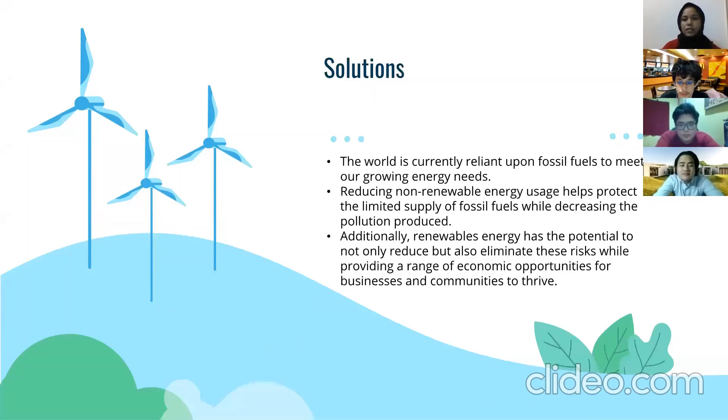The world is currently reliant upon fossil fuels to meet our growing energy needs. Reducing non-renewable energy usage helps protect the limited supply of fossil fuels while decreasing the pollution produced. Additionally, renewable energy has the potential to not only reduce but also eliminate this risk, while providing a range of economic opportunities for businesses and communities to thrive.

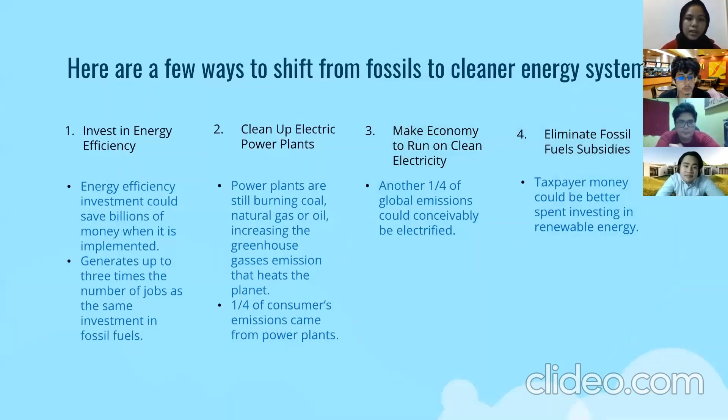Here are a few ways to shift from fossil to cleaner energy systems. Firstly, invest in energy efficiency. Energy efficiency investment could save billions of money when it is implemented. It will also generate up to 3 times the number of jobs as the same investment in fossil fuels.

Next, clean up electric power plants. Power plants are still burning coal, natural gas, or oil, increasing the greenhouse gas emissions that heats the planet. A quarter of consumer emissions came from power plants.

Next, make the economy run on clean electricity. Lastly is eliminate fossil fuel subsidies.

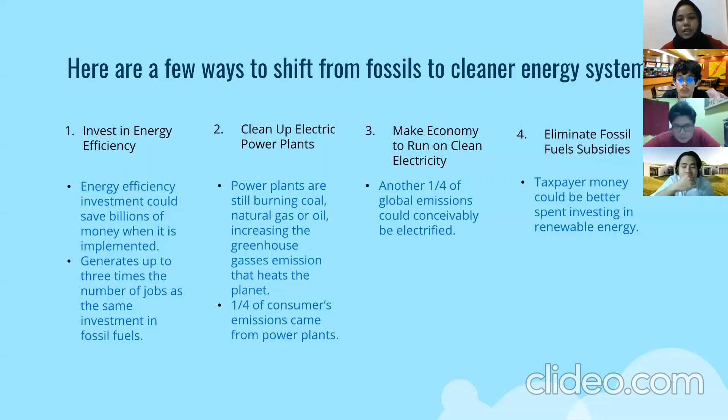Okay, for the factors, non-renewable energy will potentially undergo an age of extinction within the next hundred years or so in the future. So humans need an alternative energy to ensure the sustainability of human beings for survival.

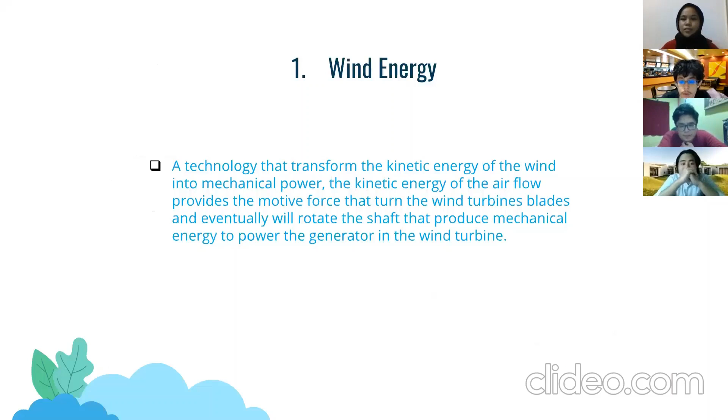Okay, the first energy that we're gonna talk about is wind energy, an energy that transforms the kinetic energy of the wind into mechanical power. The kinetic energy of the air flows provides the motive force that turns the wind turbine blades and then eventually will rotate the shaft that produces mechanical energy to power the generator in the wind turbine.

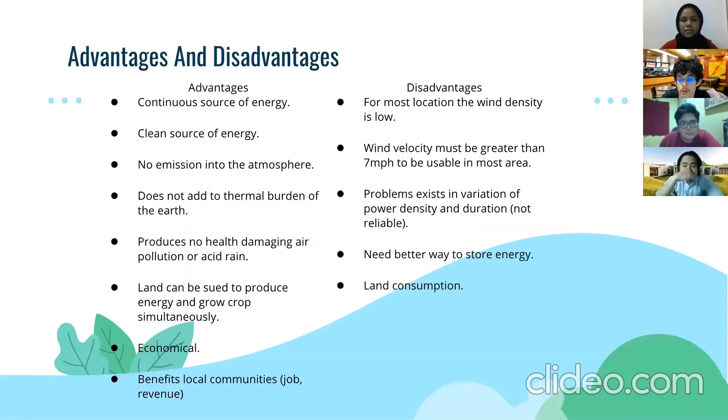Advantages and disadvantages. Advantages: continuous source of energy, clean source of energy, no emission into the atmosphere, does not add to the thermal burden of the earth. Disadvantages: for most locations, the wind density is low, wind velocity must be greater than 7 miles per hour to be usable in most areas.

Second energy that we've chosen is solar energy, an energy that derives from the sun. This energy can be used to generate electricity and heat.

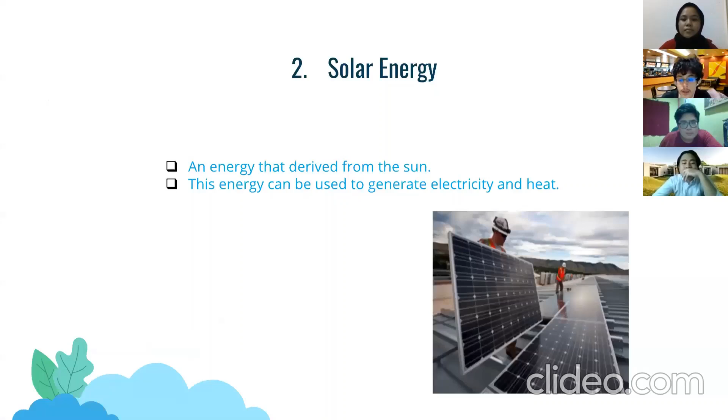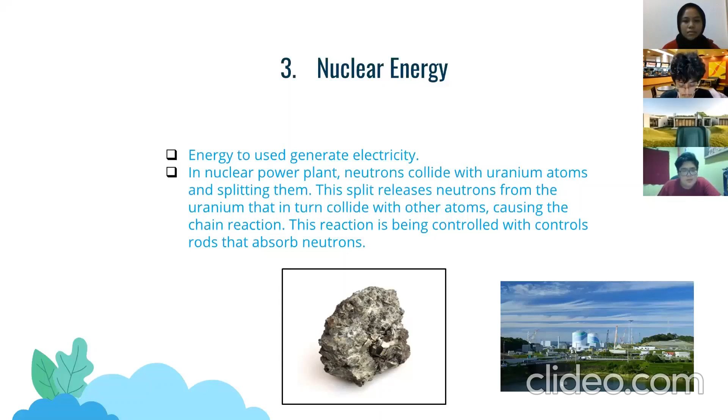Basically, nuclear energy is used to generate electricity, which uses the principle of neutrons colliding with uranium atoms and splitting them. This split releases neutrons from the uranium that in turn collide with other atoms, causing chain reactions. This reaction is controlled with control rods that absorb neutrons.

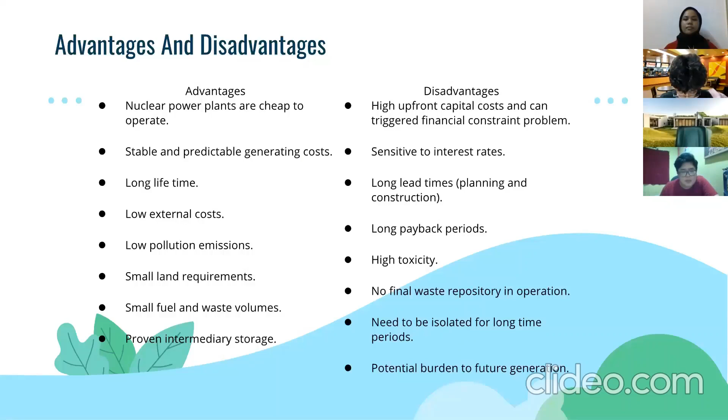Meanwhile, for the disadvantages of nuclear power plants, there are high upfront capital costs that can trigger financial constraint problems, sensitivity to interest rates, and long lead times such as planning and construction.

And the last one is hydropower energy. Hydropower energy is energy that converts the potential energy of water force by electromechanical means.

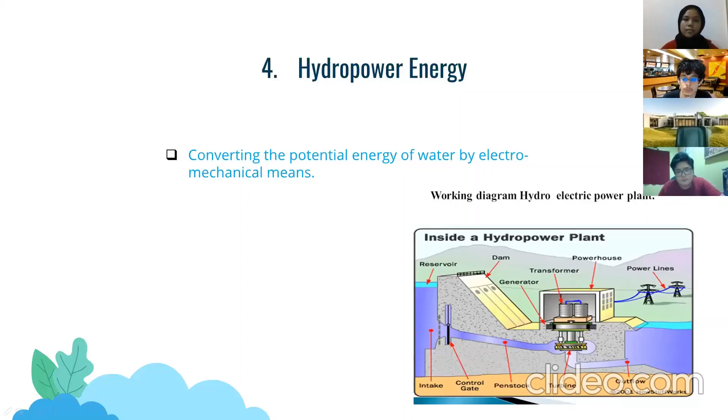As usual, for the advantages and disadvantages: advantages are clean fuel source, renewable power source, generally available, and offering a variety of recreational activities such as fishing, swimming, and boating.

For the disadvantages, the building of dams can impact fish populations, and can impact water quality and flow, which can directly affect the dissolved oxygen level in water. It can also be impacted by drought when there is no water or the water level is low, so the dam cannot produce electricity.

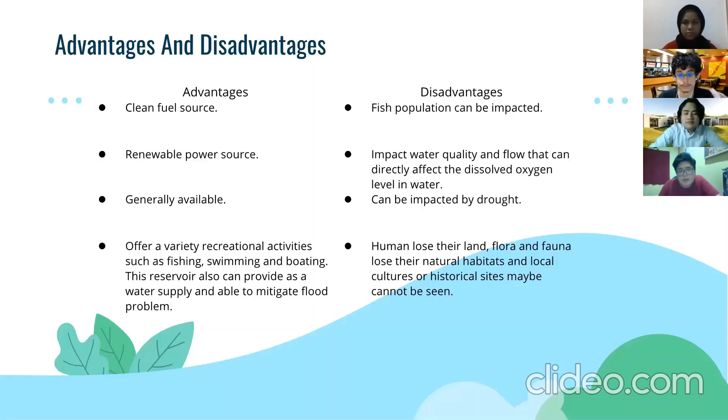And the last one, humans lose the land, and flora and fauna lose their natural habitats, and local culture or historical sites may no longer be seen due to the construction of them.

Okay, for the industrial application, first we have solar energy. The Nyngan Solar Plant is located on an agricultural property nearly 10 kilometers from Nyngan town. This town receives a decent amount of sunlight, making it a suitable place for a solar farm.

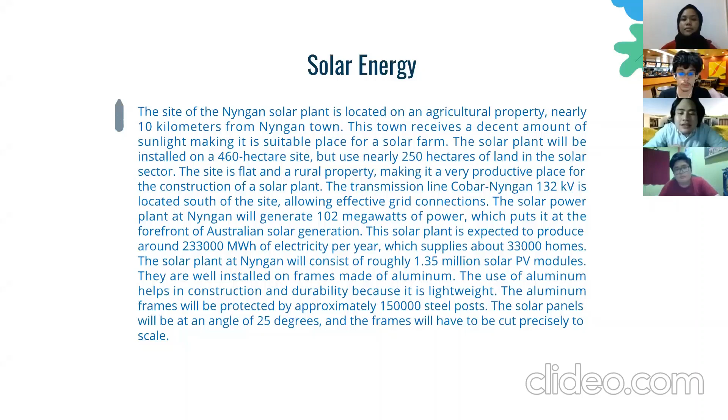The solar plant will be installed on a 460 hectare site, but uses nearly 250 hectares of land in the solar sector. The site is flat and a rural property, making it a very productive place for the construction of a solar plant. So this is the solar farm at Nyngan.

Okay, next we have wind energy. The industrial application for wind energy is the Macarthur wind farm. This wind farm was designed by contractors Vestas and Leighton. The Macarthur wind farm is situated on 3 properties which are used to graze sheep.

The 5,500 hectare land is about 16 kilometers from Macarthur. The wind farm consists of 140 3-megawatt turbines, giving a huge total of 420 megawatts.

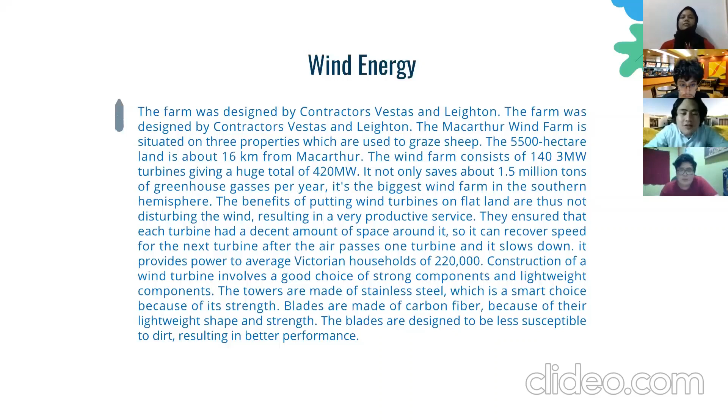It not only saves about 1.5 million tons of greenhouse gases per year, it's also the biggest wind farm in the southern hemisphere. So this is the plan outline for the Macarthur wind farm.

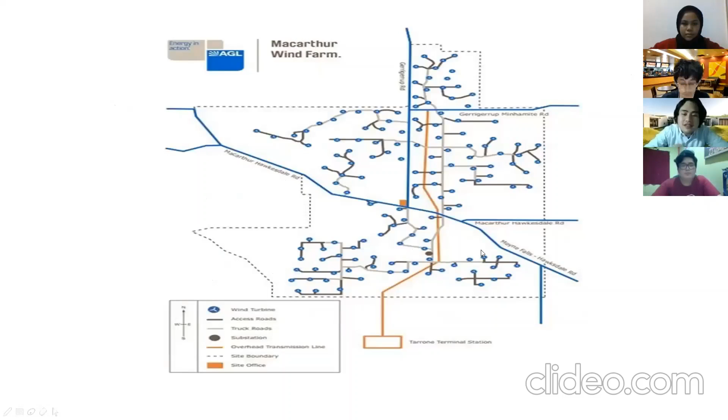Next we have hydropower energy. The industrial application of hydropower energy is called the Snowy Mountains Project. It's a 3,950 megawatt hydroelectric power production plant situated in the Australian Southern Alps in the Snowy Range. The Snowy Mountains Scheme is constructed where steep mountains are situated, easily turning the turbines because of the extra use of gravitational energy.

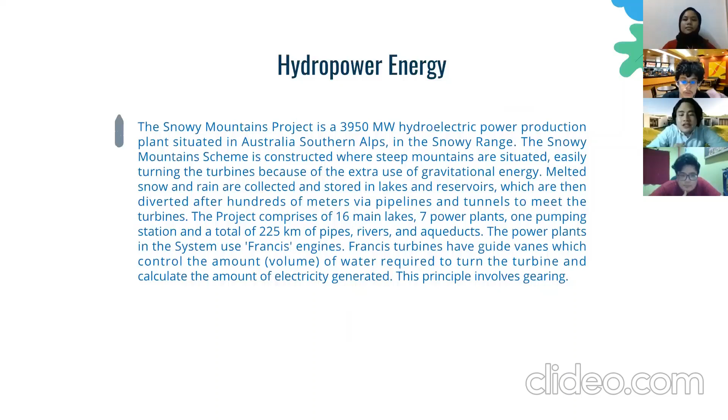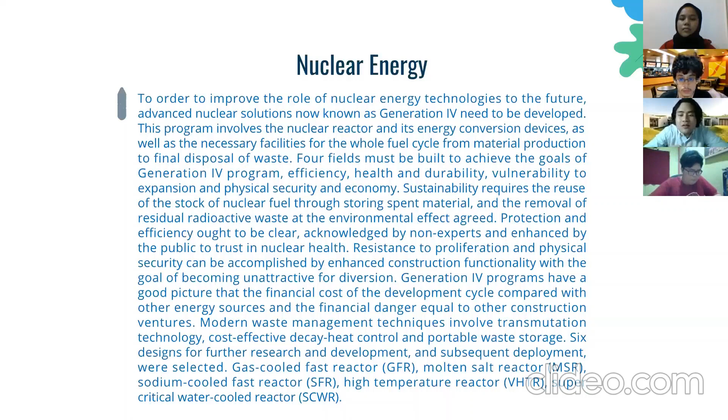And lastly, for nuclear energy, in order to improve the role of nuclear energy technologies for the future, advanced nuclear solutions, now known as Generation 4, need to be developed. This program involves the nuclear reactor and its energy conversion device, as well as the necessary facilities for the whole fuel cycle, from material production to final disposal of waste.

So, as a conclusion, alternative energy is needed to replace human reliance on crude oil as the source of energy. The variety of alternative energy includes wind energy, solar energy, nuclear energy, and hydropower.

Nevertheless, humans have not yet completely relied on this alternative energy, and there's still a huge percentage that humans depend on crude oil. Due to this, alternative energy needs more technology to increase its efficiency to generate more electricity or power.

Although these alternative energy sources have their advantages, there are still some disadvantages or cons that may happen with these alternative energy systems. We humans need to create some safety precautions or standard operating procedures for emergencies in order to minimize the risk of damage in case any emergency situation occurs.

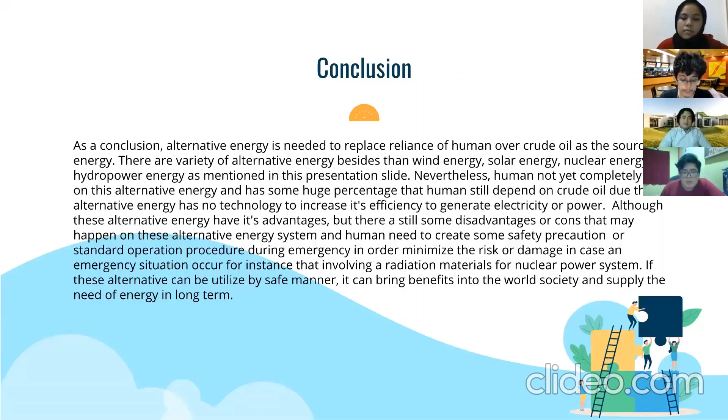For instance, alternative energy involving radioactive material, such as a nuclear power system. So if this alternative energy can be utilized in a safe manner, it can bring benefits to the world, society, or humans, and it can supply the need for energy in the long term.